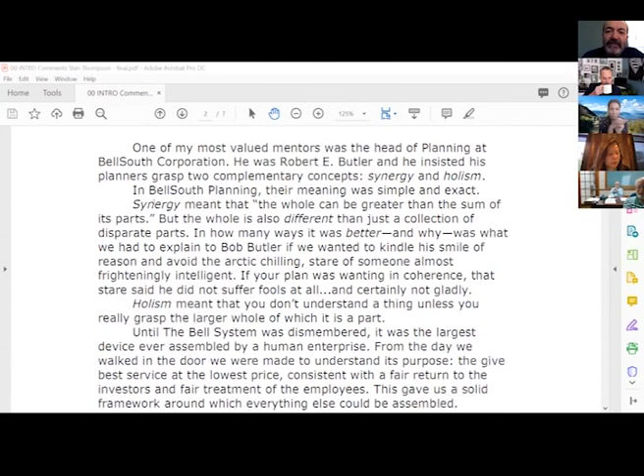Jumping in from 30,000 feet, too often we internalize the wisdom of our mentors and profit from it without reflecting enough on the lifetime of diligent inquiry that went into integrating what was shared with us. One of my most valued mentors was the head of planning at BellSouth Corporation, Robert E. Butler, and he insisted his planners grasp two complementary concepts: synergy and holism.

In BellSouth planning, their meaning was simple and exact. Synergy meant that the whole can be greater than the sum of its parts, but the whole is also different than just a collection of disparate parts. In how many ways it was better and why was what we had to explain to Bob Butler if we wanted to kindle his smile of reason and avoid the Arctic chilling stare of someone almost frighteningly intelligent. If your plan was wanting in coherence, that stare said he did not suffer fools at all, and certainly not gladly.

Holism meant that you don't understand a thing unless you really grasp the larger whole of which it is a part. Till the Bell system was dismembered, it was the largest device ever assembled by human enterprise. From the day we walked in the door, we needed to understand its purpose: give the best service at the lowest price, consistent with a fair return to the investors and fair treatment of the employees. This gave us a solid framework around which everything else could be assembled.

It was while writing a report for corporate management that I came across the hydrogen economy concept. Instantly, I knew it was the very stuff of Bob Butler's synergy, and that hydrogen would someday be the cornerstone of a new and different energy wholeness.

Eventually, in 1996, I graduated from BellSouth's Atlanta campus, retired to Mooresville, where I became involved in environmental compliance and the role transportation plays in it.

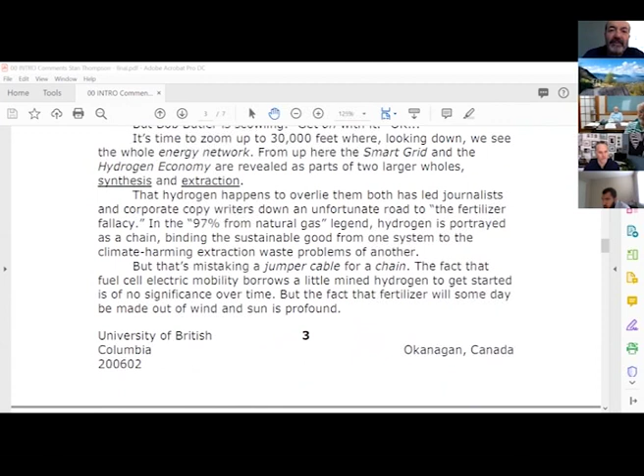From up here, the smart grid and the hydrogen economy are revealed as parts of two larger wholes: synthesis and extraction. That hydrogen happens to overlie them both has led journalists and corporate copywriters down an unfortunate road to the fertilizer fallacy. In the '97% from natural gas' legend, hydrogen is portrayed as a chain binding the sustainable good from one system to the climate-harming extraction waste problems of another. But that's mistaking a jumper cable for a chain.

The fact that fuel cell electric mobility borrows a little mined hydrogen to get started is of no significance over time, but the fact that fertilizer will someday be made out of wind and sun is profound.

Over the long sweep of time, a 30,000-foot view of the Industrial Revolution reveals a trend. In the early times, matter is extracted from the earth to make energy, leaving accumulated waste. But the future trend is for energy to synthesize matter from the atmosphere and from electrolyzed water, producing no waste.

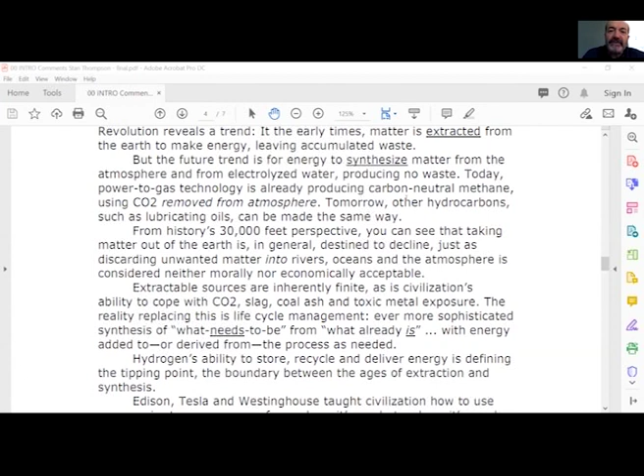Today, power-to-gas technology is already producing carbon-neutral methane using CO2 removed from the atmosphere. Tomorrow, other hydrocarbons, such as lubricating oils, can be made the same way.

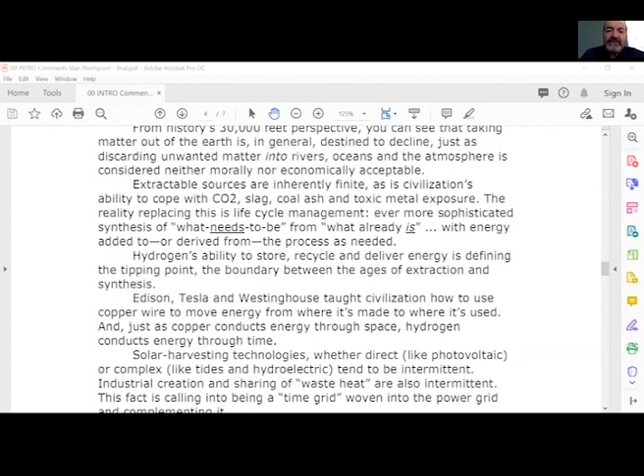From history's 30,000 feet perspective, you can see that taking matter out of the earth is, in general, destined to decline, just as discarding unwanted matter into rivers, oceans, and the atmosphere is considered neither morally nor economically acceptable. Extractable sources are inherently finite, as is civilization's ability to cope with CO2, slag, coal ash, and toxic metal exposure.

The reality replacing this is life cycle management, even ever more sophisticated synthesis of what needs to be from what already is, with energy added to or derived from the process as needed.

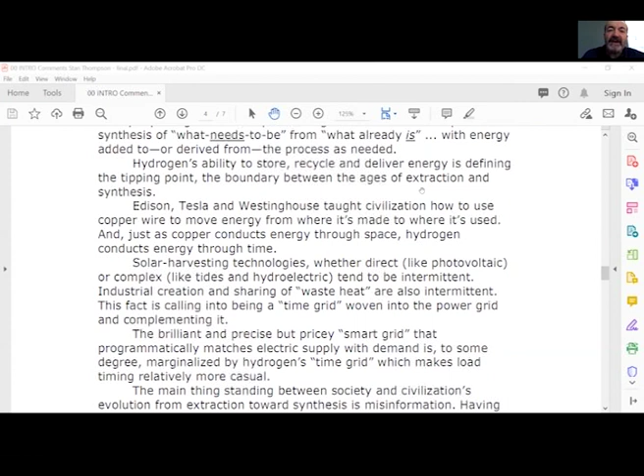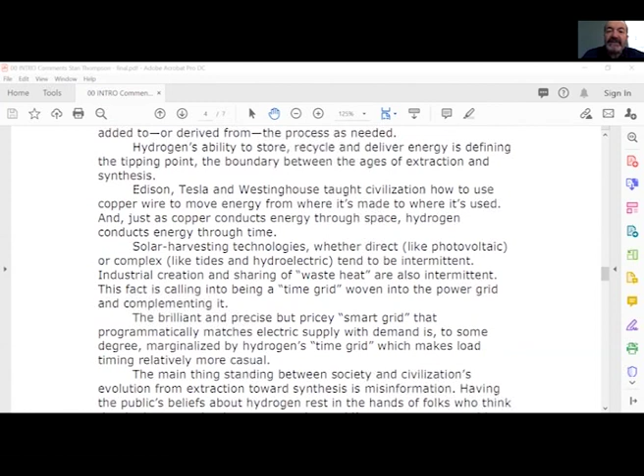Hydrogen's ability to store, recycle, and deliver energy is defining the tipping point, the boundary between the ages of extraction and synthesis. Edison, Tesla, and Westinghouse taught civilization how to use copper wire to move energy from where it's made to where it's used. And just as copper conducts energy through space, hydrogen conducts energy through time.

Solar harvesting technologies, whether direct like photovoltaic or complex like tides and hydroelectric, tend to be intermittent. Industrial creation and sharing of waste heat are also intermittent. This fact is calling into being a time grid woven into the power grid and complementing it.

The brilliant and precise but pricey smart grid that programmatically matches electric supply with demand is, to some degree, marginalized by hydrogen's time grid, which makes load timing relatively more casual.

The main thing standing between society and civilization's evolution from extraction towards synthesis is misinformation. Having the public's beliefs about hydrogen rest in the hands of folks who think that hydrogen technology uses up the world's water is unacceptable. The fact that the Hindenburg was diesel powered and that burning hydrogen is invisible has begun to penetrate that folk hoax at last.

But the too near universal mutual plagiarism, calling it 'the most abundant element of the universe' as if it were relevant, needs to be ridiculed in print until no one risks spouting it.

Public awareness of sustainability and renewable energy is well enough understood and accepted that if properly fleshed out, the extraction to synthesis trend and hydrogen's central enabling unique role in welcoming it, should be comprehensible by the educated lay public.

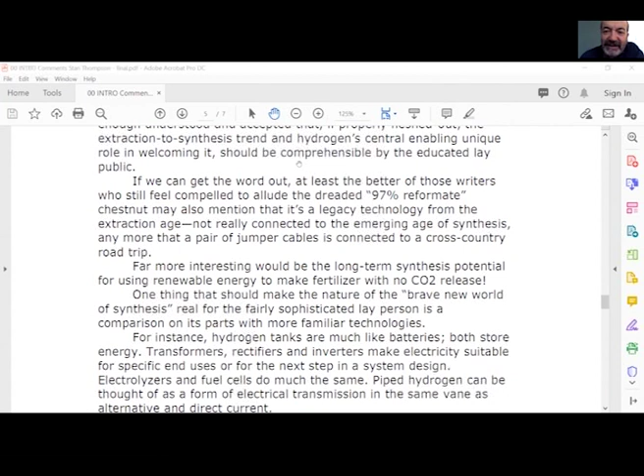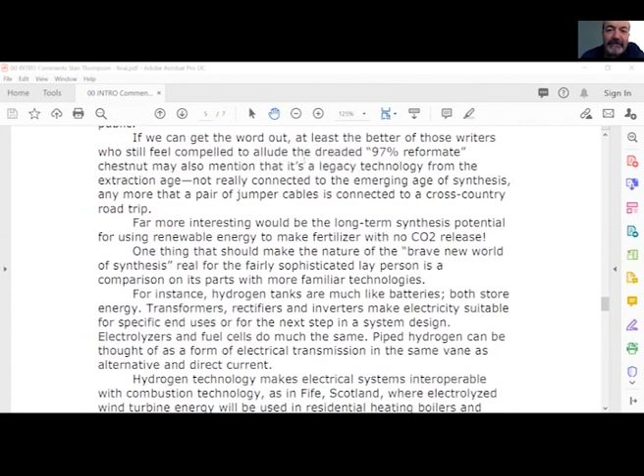We can get the word out, at least the better of those writers who still feel compelled to allude to the dreaded '97% reformate' chestnut may also mention that it's a legacy technology from the extraction age, not really connected to the emerging age of synthesis, any more than a pair of jumper cables is connected to a cross-country road trip.

Far more interesting would be the long-term synthesis potential for using renewable energy to make fertilizer with no CO2 release.

One thing that should make the nature of the brave new world of synthesis real for the fairly sophisticated layperson is a comparison of its parts with more familiar technologies. For instance, hydrogen tanks are much like batteries; both store energy. Transformers, rectifiers, and inverters make electricity suitable for specific end uses or for the next step in a system design. Electrolyzers and fuel cells do much the same.

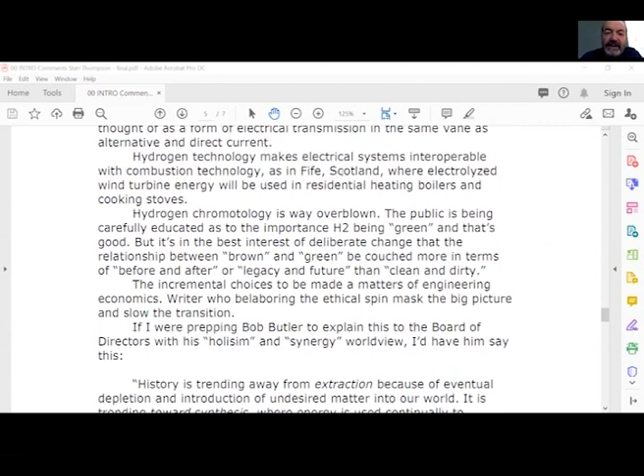Piped hydrogen can be thought of as a form of electrical transmission in the same vein as alternating and direct current. Hydrogen technology makes electrical systems interoperable with combustion technology, as in Fife, Scotland, where electrolyzed wind turbine energy will be used in residential heating boilers and cooking stoves.

Hydrogen chromatology is way overblown. The public is being carefully educated as to the importance of H2 being green, and that's good. But it's in the best interest of deliberate change that the relationship between brown and green be couched more in terms of before and after, or legacy and future, than clean and dirty. The incremental choices to be made are matters of engineering economics. Belaboring the ethical spin masks the big picture and slows the transition.

If I were prepping Bob Butler to explain this to the board of directors with his holism and synergy worldview, I'd have him say this: history is trending away from extraction because of eventual depletion and introduction of undesired matter into our world. It's trending towards synthesis, where energy is used continually to rearrange the matter we already have.

Electricity has long made it possible to create energy where most convenient, but to use it where it's most needed. The recent acceptance of hydrogen technology has given us a similar ability to separate when we create energy from when we use it. As we make all future resource allocation decisions, we need to prefer investments that fit into the emerging world of synthesis and do not depend on the retreating world of extraction any more than immediate exceptions may mandate. We need to be sure that all our people understand this, especially corporate communications, because customers and regulators need to understand it too.

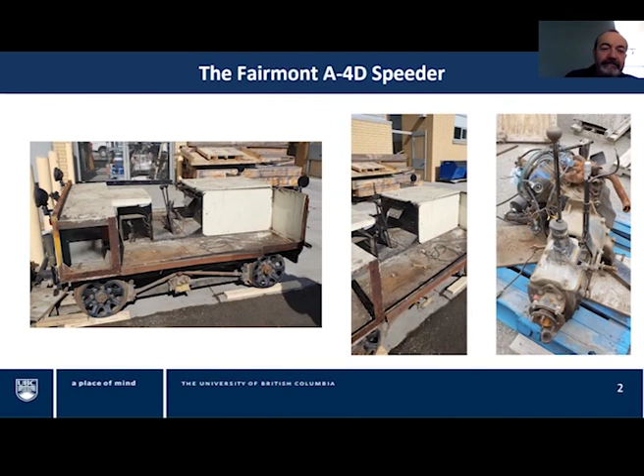It had a manual transmission gearbox with a single reverse gear and 4 forward gears. When we received it, it was not in working order, although our lab technicians managed to get the engine to work. The idea is to convert it into a hydrogen-powered vehicle where we could demonstrate the Hydrail technology and for the vehicle to be used as a test bed for future research.

The current powertrain is a series hybrid where we have a hydrogen fuel cell acting as a charger for our lithium iron phosphate battery bank. The batteries are tasked with meeting all the power dynamics, which is meant to improve performance and overall system efficiency. Power flow is unidirectional from the fuel cell to the battery bank and bidirectional between the batteries and the motor, giving us regenerative braking ability.

By design, the entire system voltage doesn't exceed 60 volts, making it a low voltage design according to CSA for safety. Low voltage means high current, which is not recommended for production as it is more costly. However, it simplifies our design and avoids us the need for specialized high voltage equipment, training, and safety certifications.

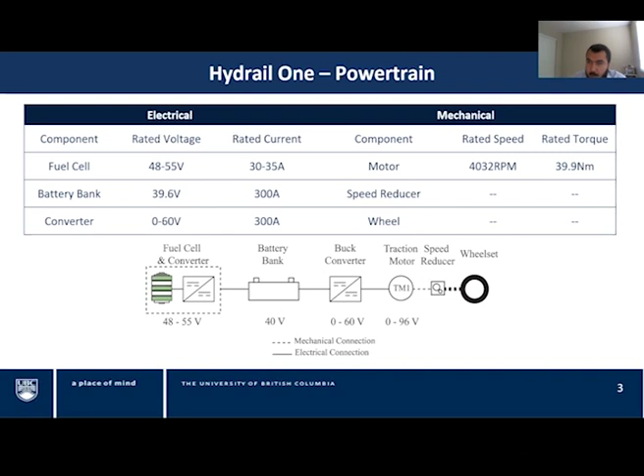So a little bit on what we plan to do with this vehicle. The retrofitted vehicle mass remains unchanged at 1,000 kilograms. We replaced the 60 horsepower engine with a 20 horsepower or 16 kilowatt electric motor.

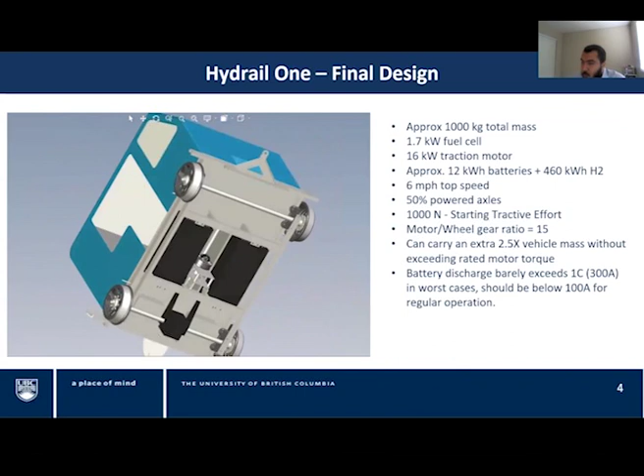The energy storage consists of 12 battery cells, each at 1 kilowatt hour, plus 2 ultra high purity, high pressure steel hydrogen tanks at 183 bar pressure, each carrying approximately 7 kilograms of hydrogen for a total onboard hydrogen of 14 kilograms. At rated power, we should get 50 minutes of operation.

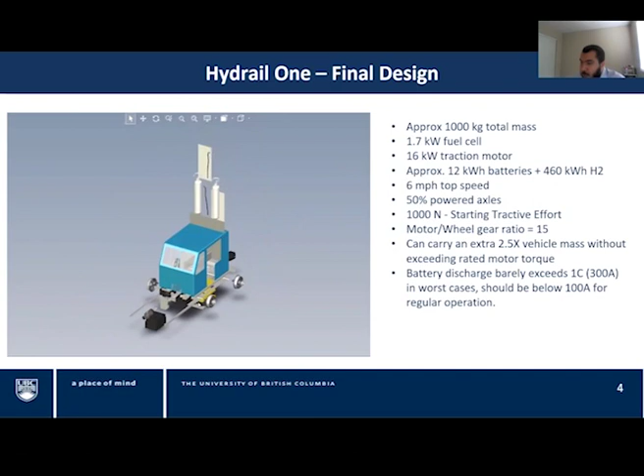However, we expect power demand on tangent level track and at speeds below 10 miles an hour to be a quarter that of rated power, for example, 3 to 4 kilowatts. This gives us approximately 7 hours of continuous operation. And if we assume a 40% fuel system efficiency, the stored hydrogen should require refilling once every 100 hours of operation.

The drivetrain was designed to focus on torque production as opposed to high speed. The vehicle should produce 1,000 newtons of starting tractive effort, meaning that for every kilogram of mass, the vehicle produces 1 newton of starting tractive effort.

For comparison, a GP9 locomotive produces approximately 2.5 newtons per kilogram, and that is a locomotive meant to pull many heavy freight rail cars behind it.

Continuous tractive effort is achieved through a combination of a unique electric motor technology and speed reduction of a 15-to-1 ratio. So we are speed reduction or torque multiplication. We're really multiplying the torque.

Theoretically, the vehicle should be able to pull 2.5 times its mass without exceeding the rated torque for the motor. And even in the most extreme cases, the batteries don't exceed their 1C discharge rate and should normally be at less than 0.3 C most of the time.

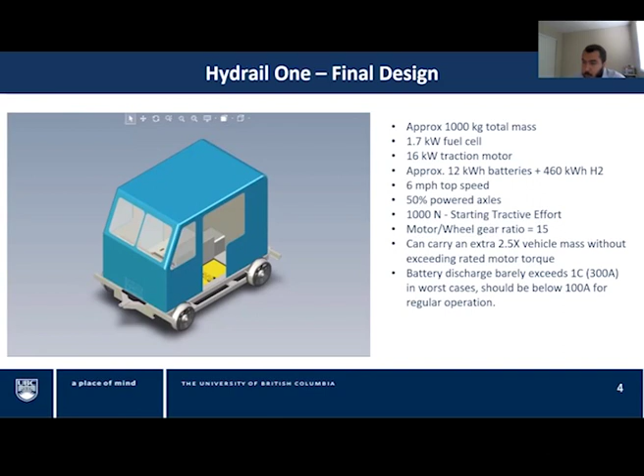So what have we done so far? Well, in March 2019, Caribou Rail delivered the speeder. Removal of the existing powertrain and other systems such as the heater, handbrake, wheels, and fuel tank was completed in May. By August 2019, we had disassembled the chassis.

Parallel with the disassembly effort, we were constantly taking measurements and updating our CAD drawing of the chassis. In September, we had a good estimate for the final vehicle mass, which we used to size the drivetrain components to ensure adequate torque production.

We also spec'd the drivetrain parts, such as the motor and speed reducer. By October, our traction motor had been delivered and our pneumatic tread brake system was designed and ready for building. We ended up ditching tread brakes for disc brakes, and our motor/speed reducer combination block was fabricated.

The battery cells, as well as the battery management system, were delivered in January 2020 and were subsequently tested. By February, we had received our Ballard fuel cell, which we have so far not tested, mainly due to regulations on in-lab hydrogen storage and then the pandemic. As of May 2020, the drivetrain and chassis are at 100%, having been assembled, tested, sandblasted, and painted.

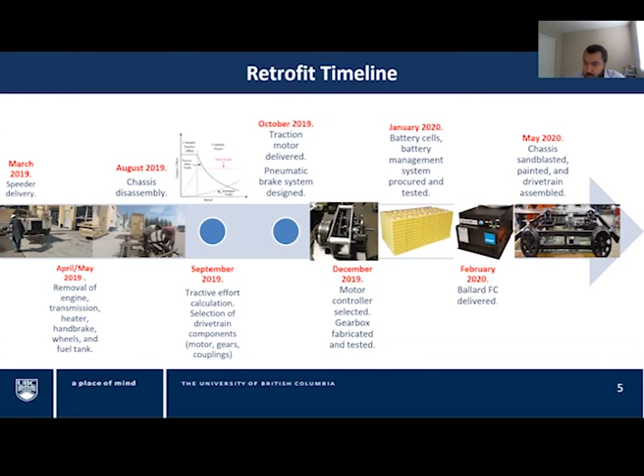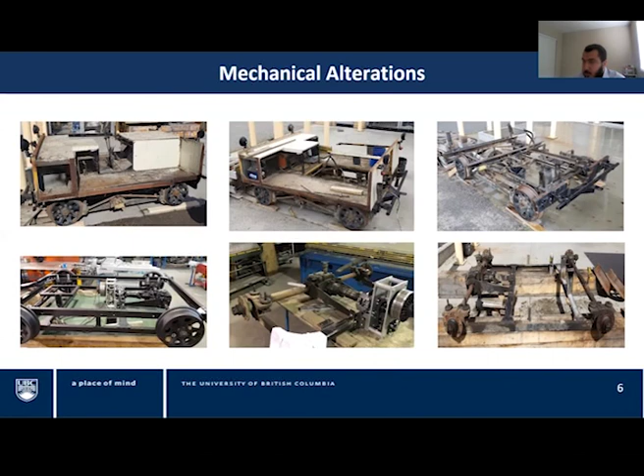Here is a short video of progress as of June 2020. So this is a week ago.

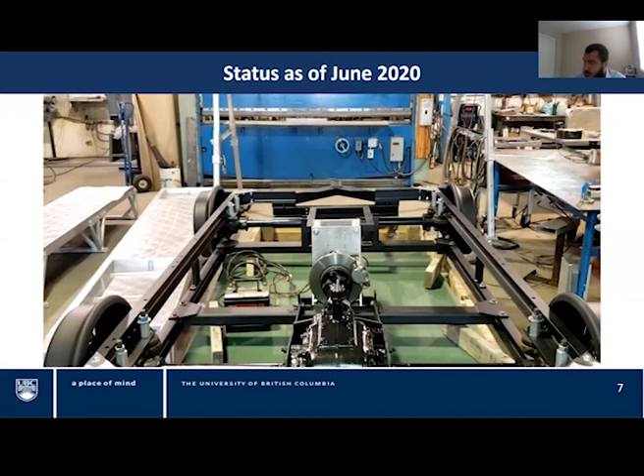All right, key design factors. When deciding upon the layout for Hydrail 1, the following objectives were kept in mind: safety, ease of use and maintenance, and simplicity of our design. Safety is obviously a priority, and therefore all design choices were made so that safety was not compromised in any way.

The greatest danger in a vehicle that runs on hydrogen gas is that the gas may combust, so our vehicle will have exceptional ventilation to prevent the buildup of hydrogen gas in case of leaks. This is why the gas lines, hydrogen cylinders, and fuel cell exhaust are all sealed off from the interior of the vehicle inside the gearbox cover, a T-shaped compartment that can't be seen in this picture, but will be seen in later pictures.

The large opening in the vehicle floor allows for airflow. Realistically, this will probably be covered by a grate vent to prevent large debris and animals from getting inside the vehicle.

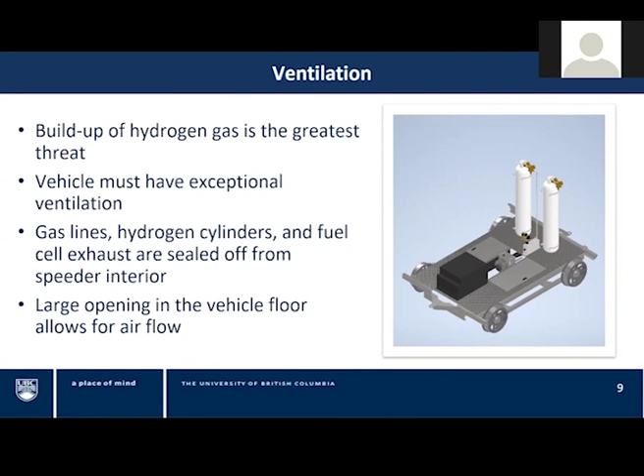The hydrogen fuel cell is the heart of Hydrail 1, providing, in addition to the battery banks, the power for operation of the entire vehicle. The fuel cell is air-cooled and therefore requires an air intake, and also produces exhaust that needs to be vented to the vehicle's exterior. For this reason, we have placed the fuel cell at the very front of the vehicle, where the internal combustion engine of a car, for example, would normally be placed.

The grill and air filter in front of the fuel cell's air intake will catch any debris, and the rear of the fuel cell is open to the exterior via the opening in the vehicle's floor. One possible improvement over the current setup would be to add a system that would catch the pure water exhaust while still allowing the air to be vented to the vehicle's exterior.

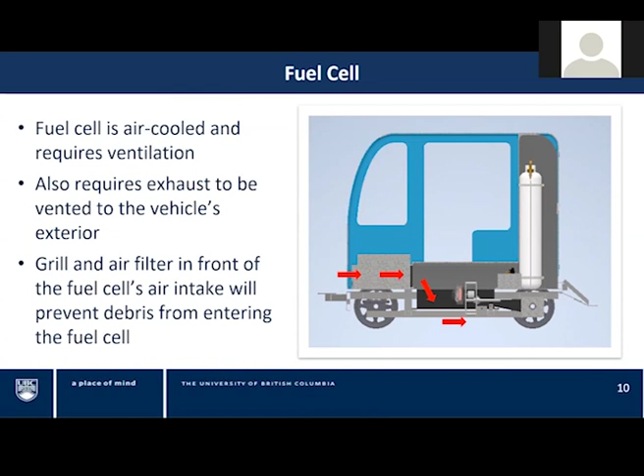The batteries that help to power Hydrail 1 are all housed in two bays located beneath the vehicle floor and accessible through hatches, one on each side. The benefit of locating them here is that it takes advantage of unutilized space and lowers the vehicle's center of gravity. Power cables from the batteries will run under the floor and up into the center of the gearbox cover to the fuel cell and dashboard.

The data cables running from the fuel cell to the valve block will run through the gearbox cover, and the gas connections from the valve block will run up to the hydrogen cylinders.

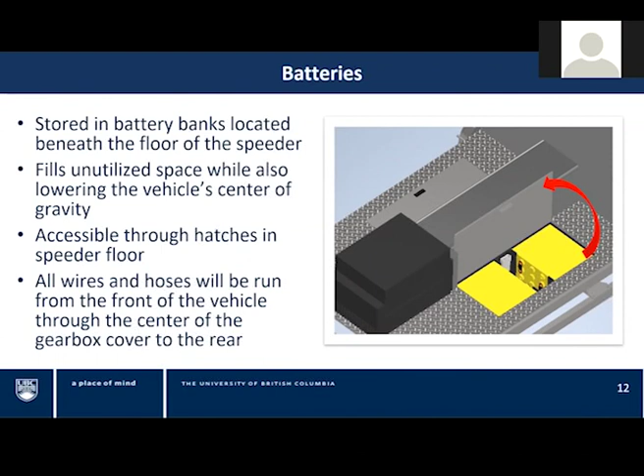Lastly, safety. It's also the most important thing I have modeled here. These features are merely representative of what will be in place in our Hydrail 1, and not necessarily going to be installed in this manner. In addition to being able to manually shut the valves in the hydrogen cylinders, there will also be an emergency shutoff button for all systems, represented by this large red button in the middle of the dashboard. There is also going to be a brake lever in addition to the throttle for sudden stopping.

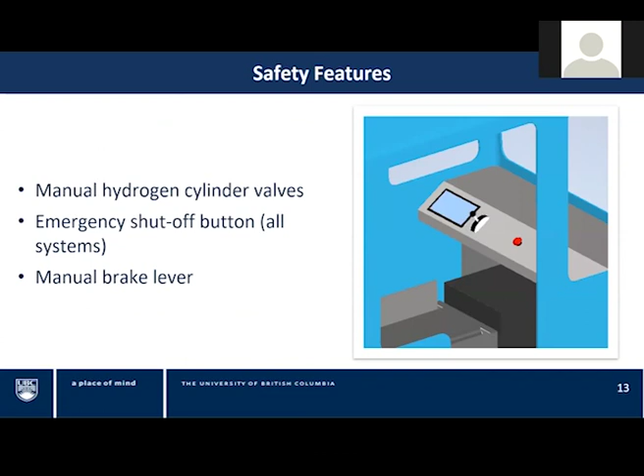All right, that's it. Thank you very much.

So here it is. So why do you need a solid state hydrogen storage? One of the big impediments to large scale adoption is cost, and a big part of that cost is in storage and transport.

Hydrogen stations, as you know, are very limited in number, although Kelowna is scheduled to get one next year. They're very expensive, costing about $2 to $3 million each pump, with very high operating costs because of the compressors and chillers needed to get to 700 bar. The second issue is hydrogen storage and transport—also very high cost, 30 times the cost of a conventional gas tank. If you imagine a gas tank in your vehicle, they're $200 to build. Right now, a high pressure hydrogen tank is somewhere between $5,000 and $7,000, if not more, to build. The high pressure requirements also create a safety factor, and put economic feasibility in play.

So how does Hydrogen In Motion resolve this issue? What we've done is made a nanomaterial. The hydrogen is attracted to the surface of the nanomaterial using van der Waals force. We keep it at 50 bar. Because it's such low pressure, we can make it in multiple sizes, from drones to swappable tanks for vehicles to tanker size for storing excess energy.

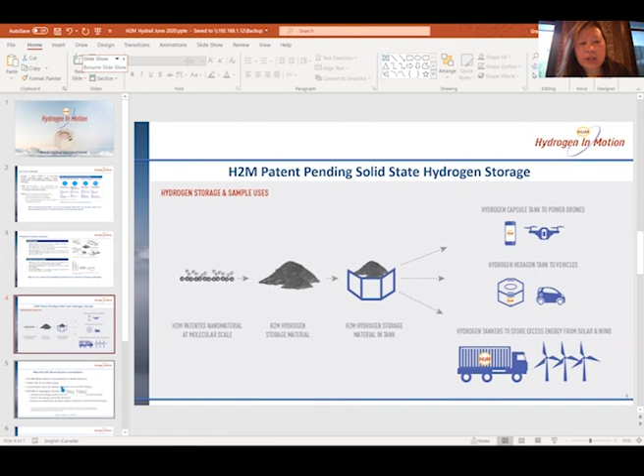So why retrofit diesel electric locomotives? Gord, you didn't go into your presentation about what the advantages are, so I thought I'd touch on it briefly. There are 25,000 diesel electric locomotives in North America—I'm unashamedly cribbing off Gord's notes, so I have to recognize that. The useful life is 50 years or more, and a locomotive costs $2 million. So the market value for just the diesel electric locomotives alone is worth $50 billion.

To retrofit a hydrogen electric locomotive, we're looking at the economic drivers. In Canada alone, your GHG savings is 6.4 megatons of CO2. That represents a carbon tax saving of $192 million at $30 a ton. And then there's also a reduction of non-attainment penalties—I know Laszlo's on the line, so he would understand this.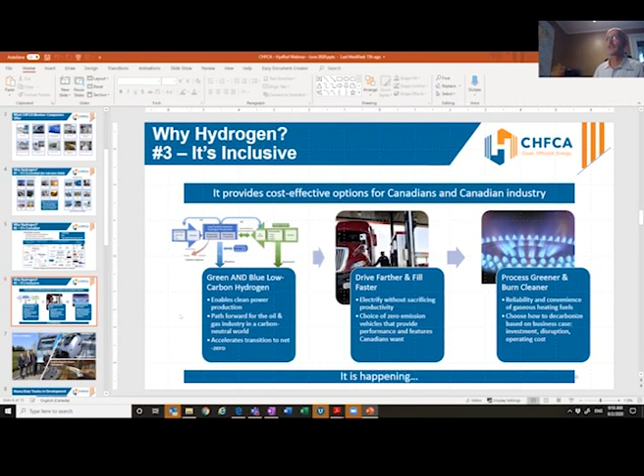So what's happening? Well, there are things certainly happening. As was mentioned earlier, Canadian companies are involved in hydrogen fuel cell projects around the world. Studies are ongoing, but it is certainly taking its time, and we certainly want to find ways to move that forward. We have many companies involved in development of hydrogen fuel cell equipment. And we just announced here in Canada, Daimler and Volvo and Rolls-Royce are expanding the work they're doing here in Canada on fuel cell technology to move that into the heavy-duty space.

We have, of course, the transit buses that are the most advanced fuel cell applications, ready for commercialization today. Many OEMs offer fully backed and warranted fuel cell electric buses, and these are ready for deployment today, and we need to be starting to look at them because they offer a very good solution for transit agencies.

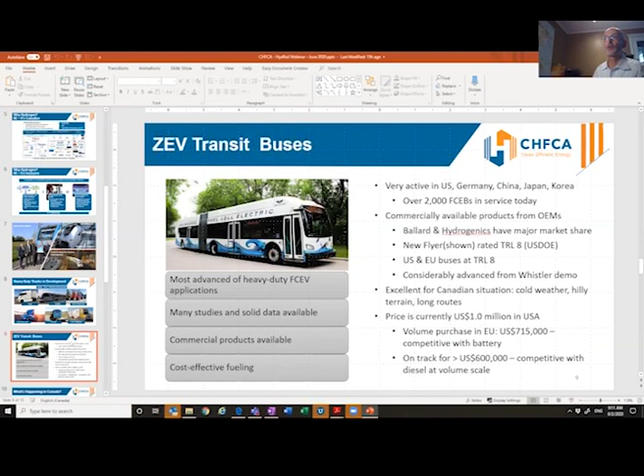So what are we seeing as a result of all this in Canada? Well, we have this technology leadership that's leading to investment, and we are seeing investment flowing into our Canadian companies now. We're seeing jobs and growth. But we always run into the question of, well, haven't we seen this before? There was a boom back in the early 2000s. What's different now? And it is different this time.

The improved cost and performance of the fuel cells and fuel cell products, the improved costs and broad availability of low carbon intensity hydrogen, and the cost for producing that is dropping. And also policies are being put in place globally that are pushing us to a carbon constrained economy that provide the business case that the hydrogen fuel cells need.

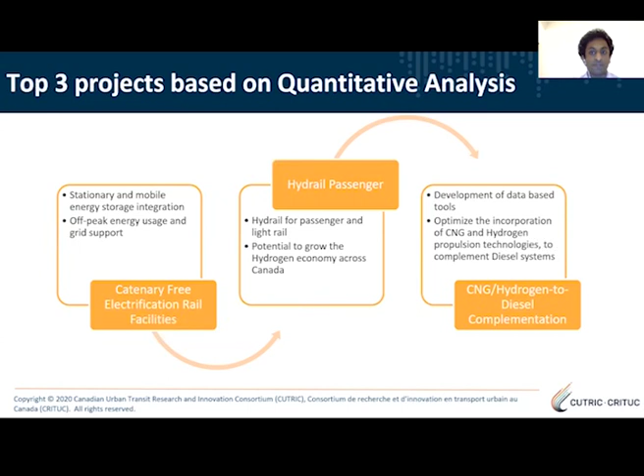Some conclusions we found from this initiative: in the short term, there is opportunity to electrify switch engines in train yards. Not an entire locomotive powertrain, but switch engines within train yards have a lot of opportunity to reduce local GHG emissions within the train yards themselves.

We also found there's an opportunity for Canada to leapfrog catenary electrification systems and move directly into advanced non-catenary electrification systems such as Hydrail and battery energy storage systems. Canadian rail industries have a strong desire to support domestic advanced rail technologies through demonstration, research, and development. We also found hydrogen fuel cell-based electric rail technologies to be one of the most beneficial ways to achieve emission goals and grow the economy through demonstration, research, and development.

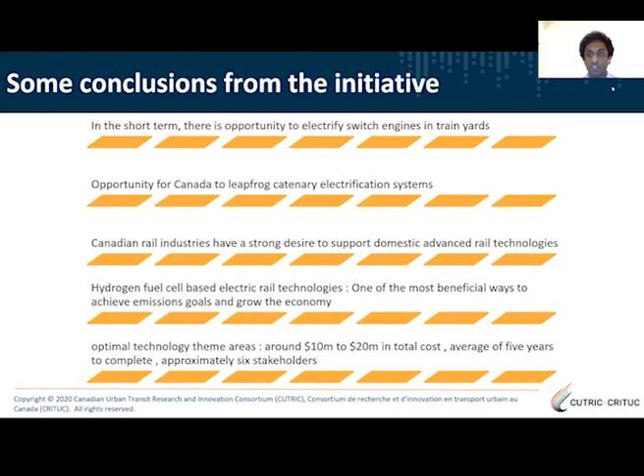One conclusion was that the optimal technology theme areas, based on interest, had a total cost around $10 million to $20 million, an average of 5 years to complete, and approximately six stakeholders—beyond which the project achieved a level of complexity that made it difficult for stakeholders to really sink their teeth into it.

This report is available on our website as of earlier this week, free for download. It will also be available from Transport Canada's website later in the year as they work through some COVID protocols, but it is available on CUTRIC's website at the moment. It's about a 100-page report—I summarized it quickly since I was only given about 10 minutes, but there's a lot of detail in there.

The last project I want to touch on—I believe Gordon, you were on one of our presentations as well for the rail report, so we do appreciate your engagement with that.

The last project I want to touch on is the British Columbia Fleet Electrification Feasibility Analysis and Simulation-Based Planning.

We have an internally developed route simulation tool that, for transit agencies in the initial stages of planning their electrification rollout, provides an assessment of their routes' capability to be electrified using today's existing technology, whether hydrogen fuel cell or battery electric, so agencies understand what it would take to electrify their fleets, what investments they'd need in chargers and fueling stations, and what routes would need to be modified, since it wouldn't be a 1:1 diesel replacement.

We found those feasibility studies are a huge aha moment for transit agencies. They don't deter agencies from electrifying, but actually drive forward electrification as they get a better understanding of what it really requires. So we proposed to the British Columbia government a provincial fleet electrification feasibility study.

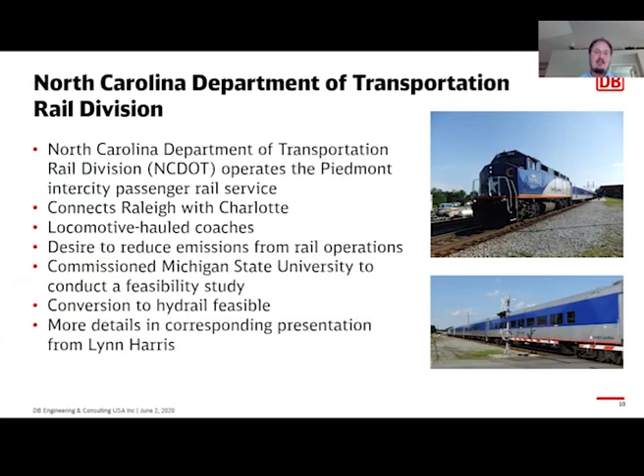North Carolina, we just completed a report at MSU for North Carolina looking into intercity passenger rail services. They are much higher power than anything Hydrail currently operating worldwide or any of the previous Hydrail demonstration projects. And we could confirm that it's actually technically feasible to operate that with a Hydrail solution. The Piedmont service connects Raleigh with Charlotte. It's locomotive hauled, different to the multiple units that we currently see. And Lynn will provide more information on that.

Last, we have Momo presenting from the California Department of Transportation, largely the rail division. They own several locomotives and rail vehicles and would like to decarbonize all of them. They provide equipment to operators. Pretty much everything right now is locomotive-hauled coaches, diesel electric locomotives, and overall the state has very ambitious goals to reduce greenhouse gases as well as air quality impacting emissions. They have commissioned DB Engineering and Consulting to investigate alternatives to diesel, and we're working collaboratively with others on that right now. Momo will actually provide you with more information on that.

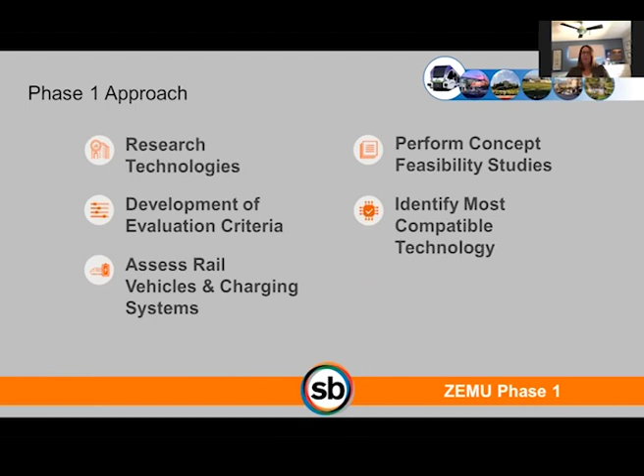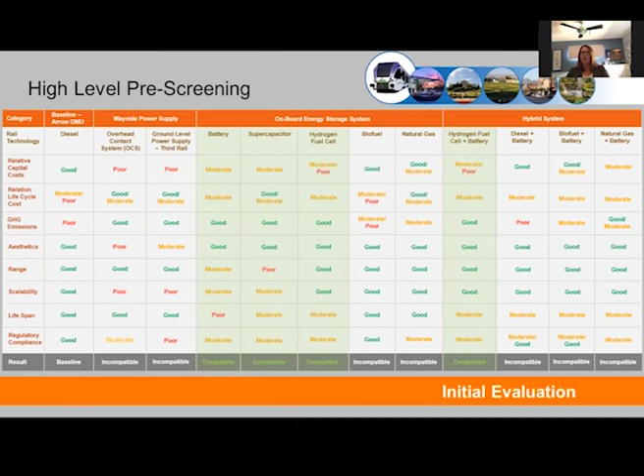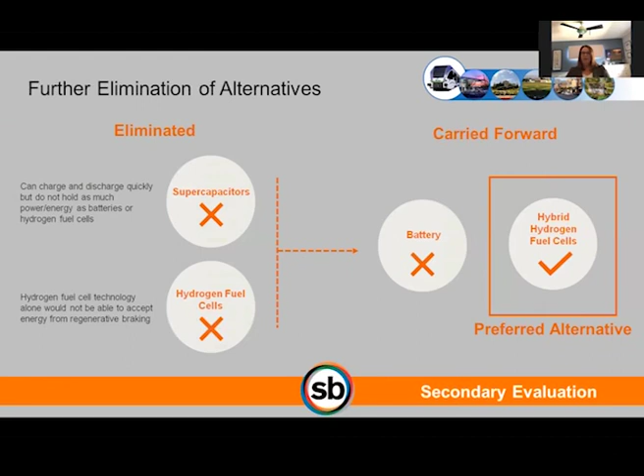I will say that SBCTA has a general aversion to overhead catenary, which I think helped us progress along. We do have a project to build half a mile of light rail in our county, estimated to cost almost $100 million, and it's going to be hard for us to sustain that level of funding if we don't find a different way to keep building out our transit network. We looked at supercapacitors, hydrogen fuel cells on their own, and obviously batteries, and then we looked at a hybrid of battery and hydrogen fuel cell, with the hybrid ultimately being our preferred alternative.

As part of our grant from the state, while we are going to operate a 2-car consist, they wanted to take the opportunity to demonstrate as much potential as there is for Hydrail.

So 2-car consist is what we're going to operate. That's one scenario we looked at. I think that the most appropriate vehicle, if we're going to run to LA Union Station, is the 4-car consist. And so we're looking at that.

And then because we are not building a 4-car consist, we had to look at a scenario 3 where we paired 2-car consists together and basically negate the weight of the Tier 4 diesel engines that wouldn't be in the ultimate 4-car consist that was hybrid, hydrogen and battery powered.

We looked at vehicle characteristics, obviously, for all of those, what they weigh, their mass, loading condition, auxiliary loads. We looked at the track characteristics. We have in the 9-mile corridor, the initial corridor, a 2% grade one way. So that takes a lot of power. We are in a very warm area, so air conditioning is extremely important. And then we just defined the key requirements.

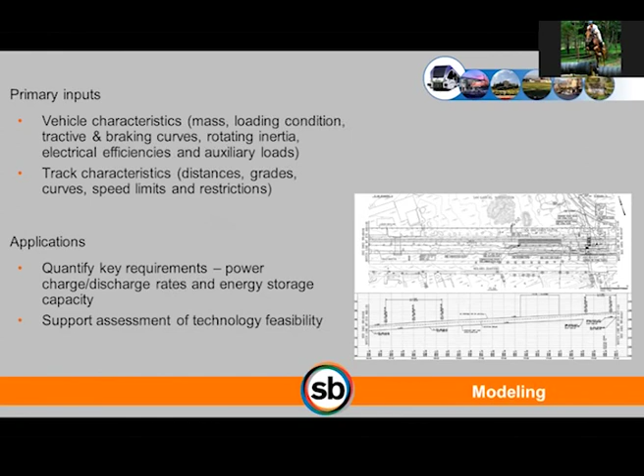So basically, this is the 2-car consist. There was a model created where we put all this data and key information into to create what our outputs would be. And that's what you see on the screen.

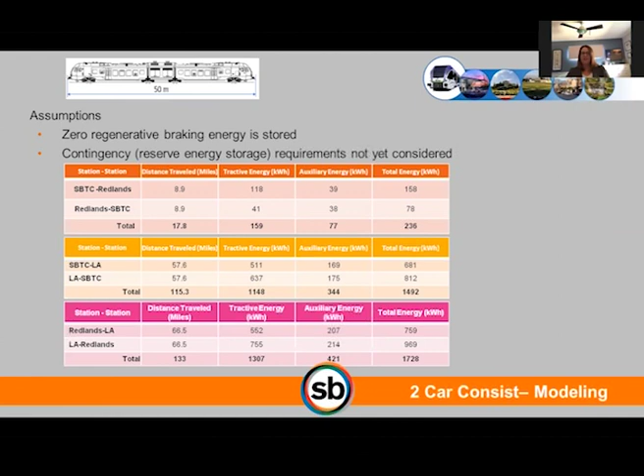So San Bernardino Transit Center to Redlands, that's our 9-mile corridor. That'll be our test bed. San Bernardino Transit Center, well, I'll just skip to the pink one at the bottom. So Redlands to LA is like our ultimate goal, to be able to demonstrate we can do this. So basically, we need to be able to run pretty much regular service on the 9-mile corridor and then demonstrate that this has feasibility to run into LA, which is about 60 miles more.

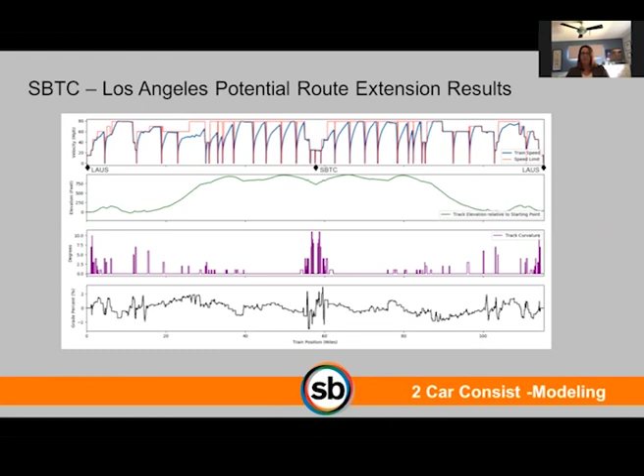So this is the way the model changes when you have to extend this to Los Angeles. So you can see very different. And you'll see that in the summary table as well, that the amount of power needed drastically changes, which makes sense. That was important in staff making a recommendation to our board on what we thought the preferred alternative should be.

One piece that we did is we wanted to really find out, do we need to capture regenerative braking or not? And so the slide that you see up there demonstrates that yes, it has a big impact, and it was worth including in the design.

So just in our 9-mile corridor, on one of the runs, 60%, and on the LA run, on one of the runs, 30%. Combined, 26, 22%.

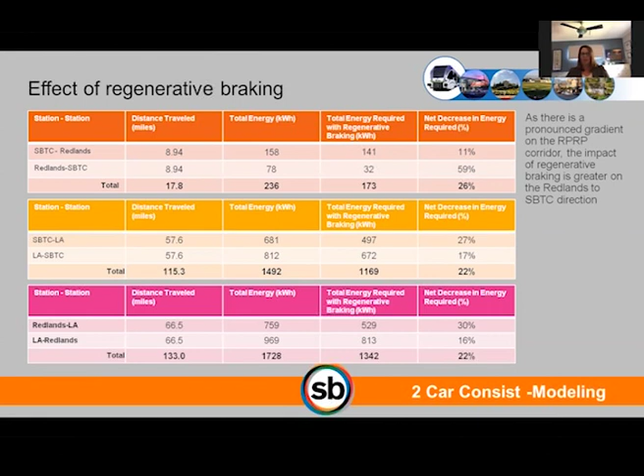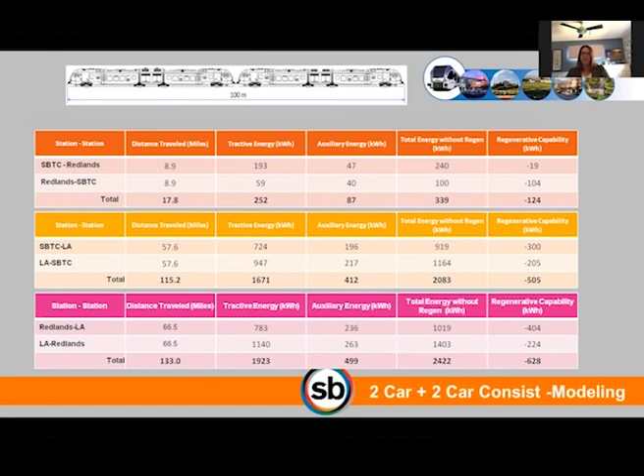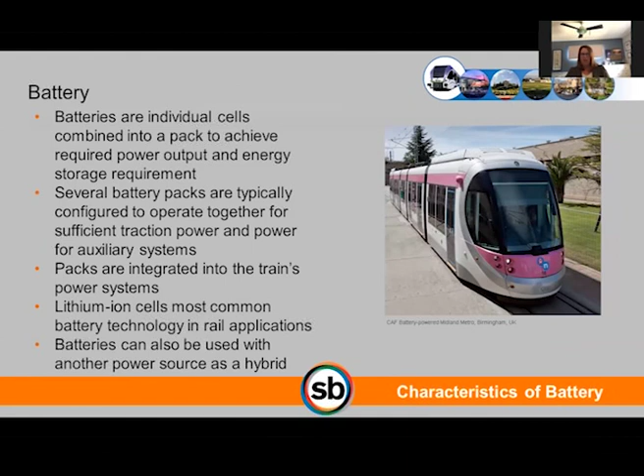So we looked at batteries, and then we looked at combining batteries and hydrogen fuel cells. And I think you guys all know what batteries are, so I'm not going to spend any time on that. Again, one of the areas that we were most concerned about was charging methods for batteries.

Specifically in the Redlands, city of Redlands area, it's a heavy historical district. There would have been a lot of adversity to installing overhead catenary. We're also extremely constrained as far as right-of-way width in that area, because we do have historic buildings on both sides of the right-of-way that we just can't, we have to protect. In addition to the cost of building it as well as maintaining it over time.

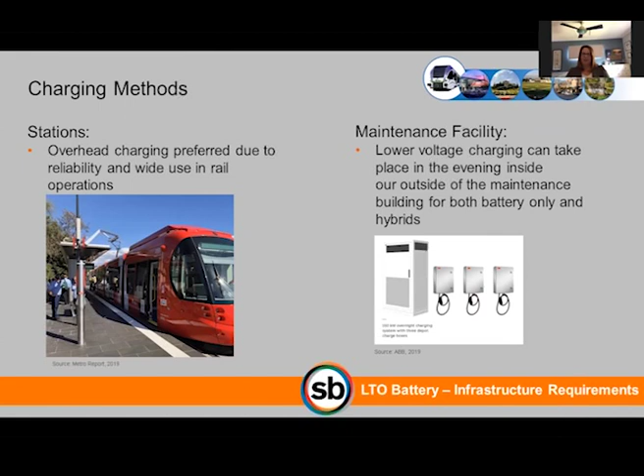Here, what I would like to point out is when we started out, our goal was to have the same performance capabilities of the DMU. As we went through contract negotiations, we did agree to have basically a floor and a target. So because this is a pilot, we needed to be a little more flexible. So right now, as we're going through conceptual design, that's what we're working through right now. Yeah, that's your floor, that's the minimum you have to do, but our target is this. And so that's kind of what we're working through right now as far as performance.

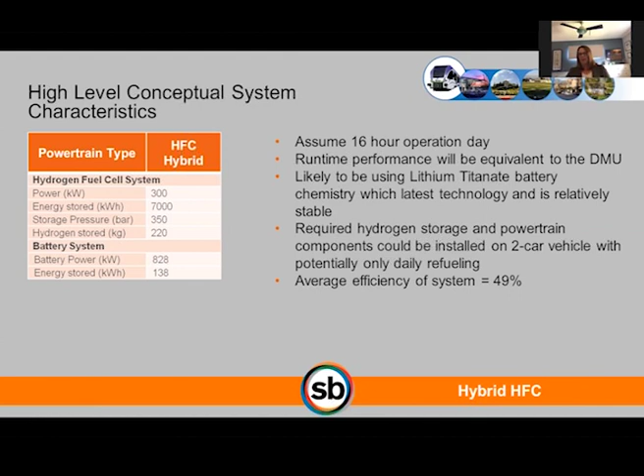I think I've covered this - it really focused on not requiring wayside infrastructure to recharge. What we really found is that with the hydrogen fuel cell piece, it provided us the viability to extend to LA Union Station without having to build inline charging, and gave us more flexibility.

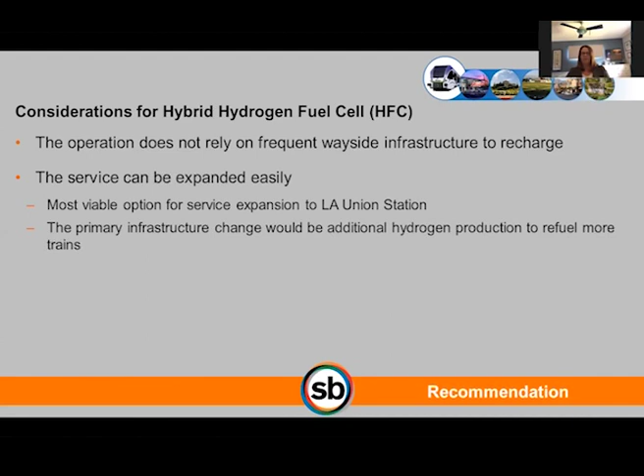That is our ultimate goal - to allow this to be expandable. We approached it wanting to keep as much of the DMU the same as we can, because Metrolink's going to have to maintain these, and we don't want a one-off vehicle. So we focused on what needs to change: the tanks, the different fuel tanks, additional volume or space needed compared to the diesel engine, the leakage monitoring equipment, temperature control especially for the batteries, and proper ventilation.

I'd like to mention that we are building a maintenance facility right now for the Arrow service, and that project was a little ahead of this opportunity to build a ZEMU. So we are working diligently to identify what needs to be modified in that facility, and it is not insurmountable - it's completely reasonable, and I think we'll be able to accomplish that.

Now that's different than the hydrogen fueling infrastructure. That will be at the facility, and we'll initially truck in, and we'll have a mobile fueling unit. But I want to touch on a couple things.

One is we, as SBCTA, do the regional planning for transportation. We just completed a zero emission bus study looking at our 5 county bus operators, and so we're developing a plan for implementation of that. I see hydrogen as a key component of that.

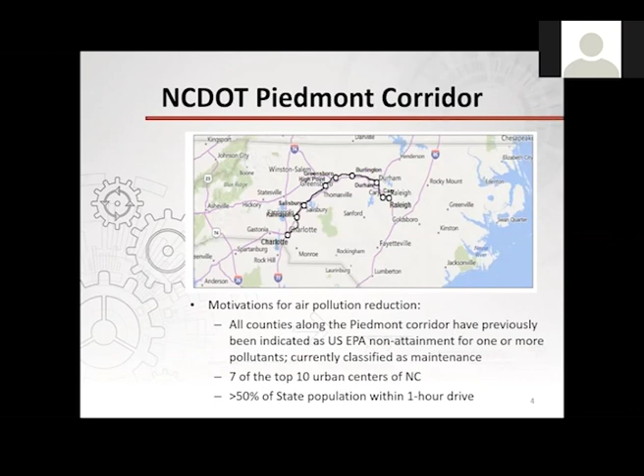We want to make sure we're not unduly contributing toward air pollution. The corridor also encompasses 7 of the top 10 urban centers of North Carolina, and greater than half the population of the state overall lives within a 1-hour drive of the corridor. So this is a substantial impact on the citizens of North Carolina.

Just more about our operational overview. Again, NCDOT is the equipment owner and maintainer of the rail vehicles. We are operated by Amtrak. We're dispatched by NS and CSX. Our corridor is 173 miles in each direction with 9 total stops, including Raleigh and Charlotte. Our travel time is just over 3 hours each direction, so we're very, very comparable with car travel between the 2 cities.

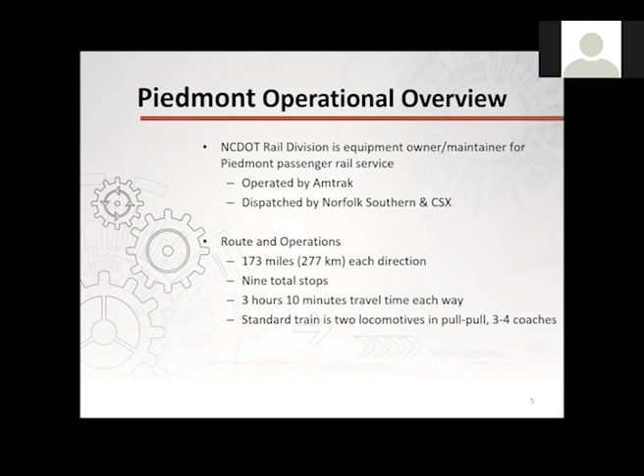Our standard train configuration is 2 locomotives in a pull-pull configuration and either 3 or 4 coach cars, depending on specific ridership for the day. Our fleet is 6 F59PH locomotives, 2 F59PHIs, and 5 cab control units. A cab control unit is simply a demotored F59PH locomotive—exact same exterior body, just everything stripped out of the long hood. It has no ability to propel itself. It's run in conjunction with a locomotive to provide pull-pull or push-pull operations. And we are currently planning to add 3 locomotives to the fleet beginning next year.

Now, the actual motive specs for our fleet: our locomotives have 3,000 horsepower EMD 710 engines. That's about 2,200 kilowatts. That's actually an interesting size to work with here because that's about the same capacity that a standard freight switcher or even some short line freight locomotives use. So one thing we can take from that is whatever we're able to implement should be easily transferable to the freight industry in that regard.

Our head-end power engines are Caterpillar C15s on our newer locomotives, and Caterpillar C18s on our older legacy locomotives. Our older locomotives, which were all rebuilt between 2010 and 2013, have prime movers that are currently EPA Tier 0 plus, with Caterpillars at Tier 2. Our newer locomotives, which make up 2 of our overall fleet, have prime movers at EPA Tier 0 plus, with HEP engines at EPA Tier 3.

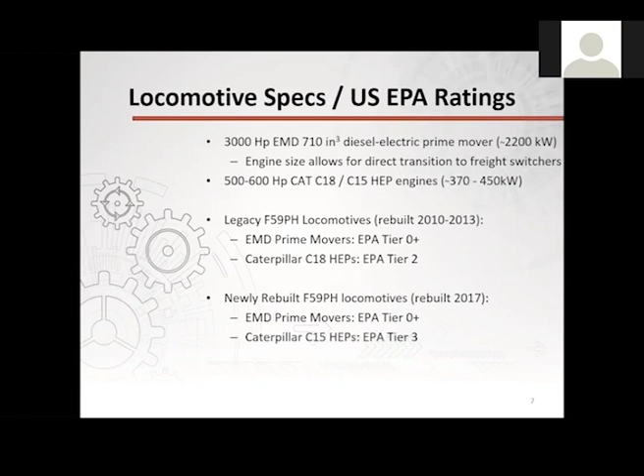So we've got a ways to go before we are all the way to where we need to be, at Tier 4 or better. Our efforts to date include biodiesel fuel testing, retrofit emissions technology implementation, and then what we're all here for, Hydrail research, which we hope to implement within the next several years.

Just touch very briefly on the testing we've done to date. In the interest of time, I won't go into tremendous detail, but the Rail Division has worked with the NC State Environmental Engineering Department since about 2009 to test various blends of biodiesel fuel. We've seen a 30 to 60% reduction of hydrocarbon, carbon monoxide, and particulate matter using lower blends of biodiesel fuel, about the 20 to 40% range. We see some marginal improvement on NOx, but not a ton, and that's to be expected - that's how biodiesel fuel typically operates.

We also built a retrofit selective catalytic reduction based aftertreatment system that we retrofitted onto one of our locomotives, and have plans to implement similar systems on additional locomotives going forward. That resulted in an emissions reduction of between 55 and 80% of all pollutants. So if we combine this retrofit emission system with biodiesel fuel, we should be able to achieve Tier 4 that way. And that is a really excellent bridge technology that can carry us for the next several years until Hydrail becomes much more standard.

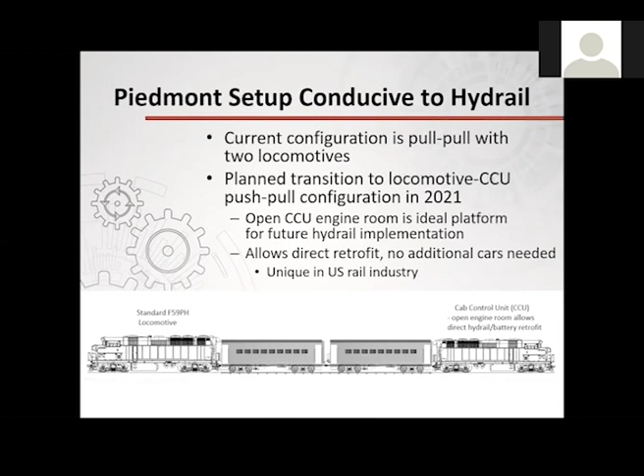We do have the option of phased implementation. We envision something along the lines of first implementing batteries into the CCU, to where you have a diesel locomotive, hopefully a Tier 4 diesel locomotive using the technologies we've pursued so far, and then a battery-powered CCU augmenting that on the other end. Subsequent to battery implementation, we could also add hydrogen tanks and fuel cells to where you then have a full-blown diesel Hydrail hybrid train.

Later down the road, when our locomotives go up for their next rebuild, which would probably be within the next 8 to 10 years, we imagine Hydrail will be established technology enough by that point that we could just pull the diesel prime movers and implement Hydrail engines, where we would have fully operational Hydrail trains. And then following that, we think we'd be in a position where we could be a model for national propagation of this type of system across other comparable intercity passenger rail agencies, and hopefully, as I alluded to earlier, even short line freight.

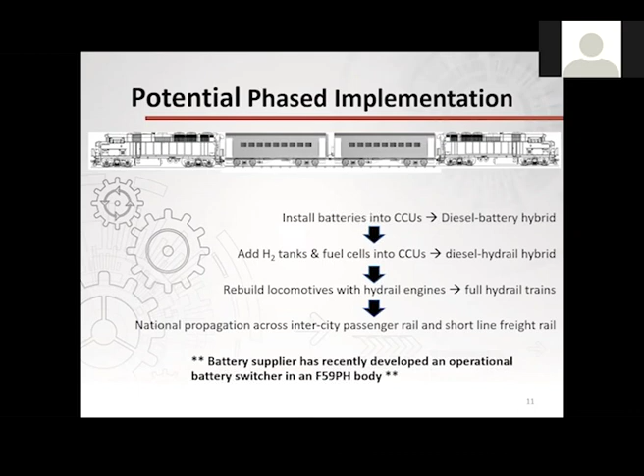That last bullet point is actually pretty important. Our primary battery supplier has recently developed an operational battery switcher for an F59PH locomotive body, which really means we've crossed all the technological hurdles ready for this first step of implementing batteries into CCUs. That would really just be an application exercise at this point. So we're making good progress on actually bringing this to reality.

So I'll kind of gloss over that one in the interest of time. This is an image of the inside of our CCU. Again, it's just the long hood of an F59PH locomotive, stripped of all engines, generators, and other auxiliary equipment.

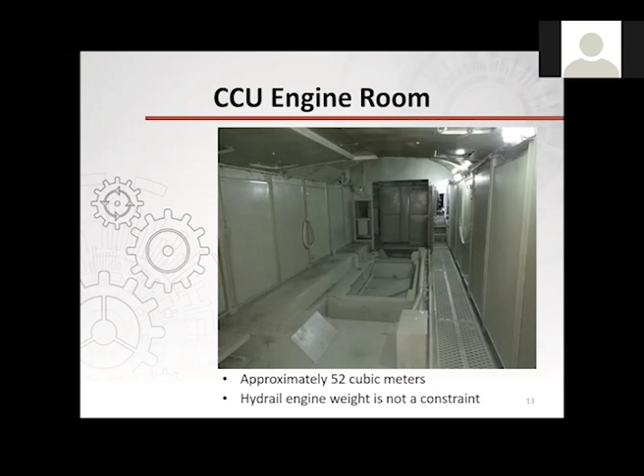Andreas and I actually took some detailed measurements of NCDOT's equipment several months ago, and it's about 52 cubic meters total, so we have a decent amount of space. One of the other things we can leverage to our advantage is that rail is not weight-limited in the same way cars and other vehicles are, so we can really pursue a heavier-is-better model as we go about physical implementation of this technology.

So the status of our Hydrail research. In 2018, NCDOT contracted with Andreas and his team at Michigan State to perform a feasibility study on NCDOT's Piedmont trains. As Andreas mentioned earlier, if we were to implement Hydrail in the future, we would be the largest rail fleet to do so. The feasibility study was actually just completed last week, and we're in the process of reviewing that, but it confirmed that a Hydrail propulsion system is feasible for NCDOT, specifically a 2-locomotive downsized fuel cell hybrid with a plug-in.

What that long name simply means is that we could divide the Hydrail propulsion components between the locomotive and the CCU. As I mentioned, our existing diesel engines are about 3,000 horsepower, and we could put around 1,500 horsepower or maybe a little more in both the locomotive and CCU to create an equivalent propulsion powertrain to what we currently have. We see best results if we recharge our batteries after each round trip between Raleigh and Charlotte. We have a captive fleet - all of our locomotives return to Raleigh every night, so that falls right in line with standard protocol for NCDOT, so we'd certainly be able to readily embrace charging our batteries on a daily basis.

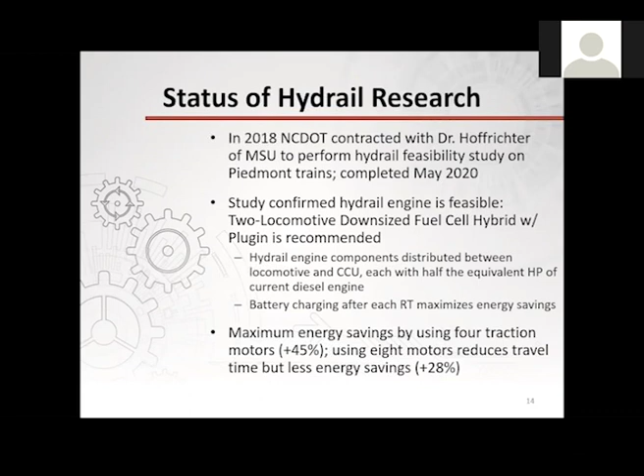So that's a decision NCDOT is going to have to make, and that falls into exactly what our next steps are - an economic analysis to determine the preferred route, whether Rail Division management wants to see trip time savings. I forgot to mention, implementing 8 traction motors actually cuts about 10 minutes off your trip time, which is not insignificant. NCDOT has made a big push over the past 10 years or so to save time wherever possible, so trying to figure out what's best from an energy savings versus trip time savings standpoint will require some further attention.

We are at the point now, based on the results of the study, where we can pursue building a prototype or demo unit, and some of the major factors there are going to be securing the funding, identifying our supply chain, identifying what tests are going to be required. We'll definitely be utilizing the H2 at Rail program that's been mentioned several times already. And the Hydrail report is going to be made available to the public for anyone who wants to see it after we get it finalized and blessed by everyone within NCDOT.

I'll talk a little bit briefly about Hydrail infrastructure. This has been touched on several times already, but we'll talk specifically for North Carolina. The results of the study confirmed that steam methane reforming and biomass sources are going to be very viable for NCDOT, both resulting in significant net positive energy reduction. North Carolina is actually very well positioned to start producing hydrogen. We have a lot of hog farms and fertilizer production as major existing industries in the eastern part of the state, and both can readily be utilized as the groundwork for hydrogen production.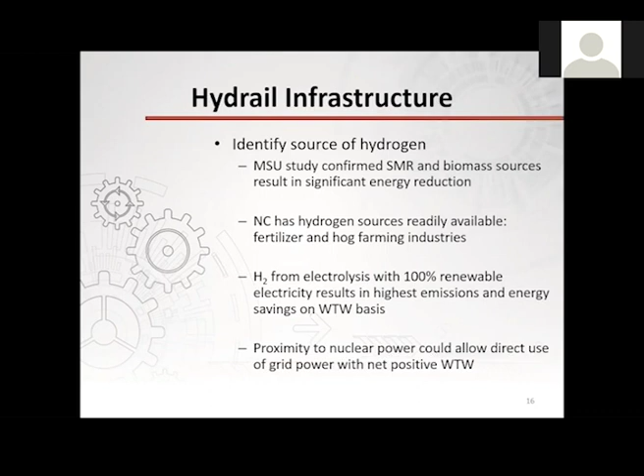We also have options such as hydrogen from electrolysis with 100% renewable electricity. That actually results in some of the highest emissions and energy savings on a well-to-wheel basis. North Carolina is also uniquely positioned in that we have a lot of extra surplus electricity from nuclear power, so we could utilize that as well and be able to just take grid power without increasing fossil fuel dependency - so again, a net positive well-to-wheel.

Another big thing to consider when talking about Hydrail infrastructure is transportation. We would initially be looking at delivery from off-site via trucks when we only have 1 or 2 Hydrail-equipped locomotives. But we would also look into building a hydrogen plant as we expand our fleet. We're well situated to possibly one day build a larger multi-user hydrogen plant. The rail yard in Raleigh is located in close proximity to other industries like waste industries, the Raleigh bus terminal, and other potential long-term users of hydrogen.

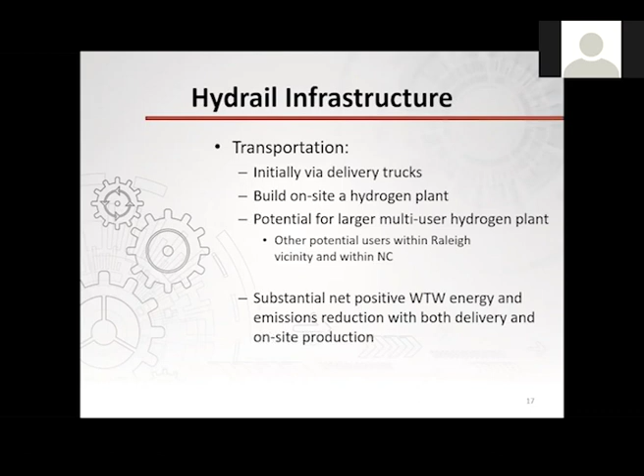One of the things the study found is that we see a net positive and almost indifferent well-to-wheel energy and emissions reduction with both delivery and on-site production. So we think we're set up very good in that regard. Just a few quick slides and then I'll wrap up.

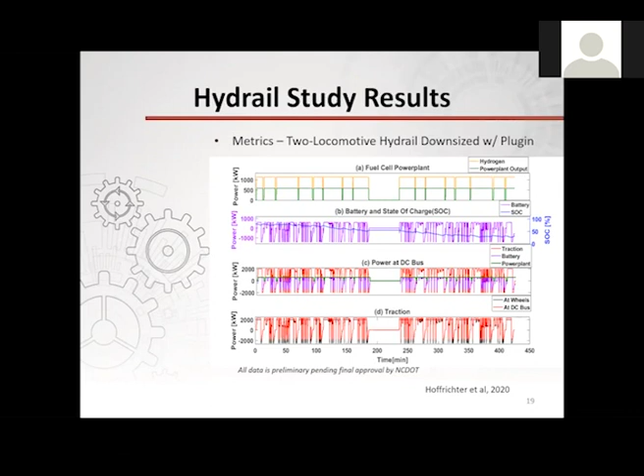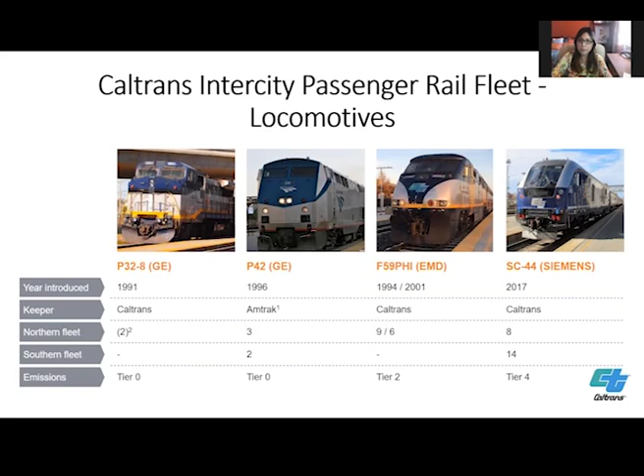Recently, we procured Siemens Charger locomotives, the SC44. We own 22 of them, 8 in Northern California and 14 in Southern California, and they are Tier 4 locomotives. Next, these are the cars that we either own or lease.

We have the California cars and we own all of them. We have 66 of them in Northern California. And then we also have Comet cars.

We also have Surfliner cars, which are bi-level cars built based on the design of the California cars, so we kind of call them California 2 cars as their nickname. We have 12 of those that we own in Northern California, and we also own 10 of them in Southern California. Then 39 of those Surfliner cars are leased from Amtrak; those were a joint procurement between Amtrak and Caltrans.

We also lease Superliner cars, old cars that we lease from Amtrak. We have 11 of those in Northern California, and 19 in Southern California.

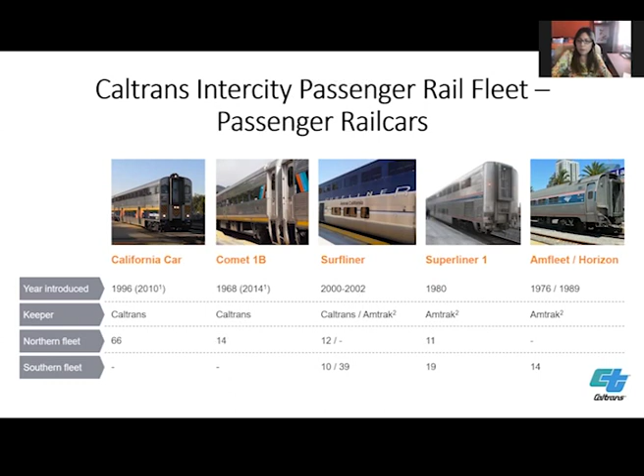We have 14 Amfleet and Horizon cars that we also lease from Amtrak, all utilized in Southern California. We also have 49 cars currently being produced by Siemens that will be deployed on the San Joaquin Corridor in the near future. Those cars are a similar design to the Brightline cars used in Florida.

So where are we going from here? The passage of AB 32, the California Global Warming Solutions Act of 2006, was landmark legislation requiring California to reduce GHG emissions to 1990 levels by 2020. I'm happy to say we have met that goal. Now we are working on SB 32, which requires GHG levels to be 40% below 1990 levels by 2030. That's what we're targeting right now.

There was also a governor's executive order, B-30-15, that further required GHG levels to be 80% below 1990 levels by 2050. We definitely believe the transportation sector must play a large role in these reductions, which are the most aggressive in the country.

We can clearly see every day that climate change is already affecting California. We see extreme heat and more frequent, intense wildfires. We used to get wildfires only in summertime, but now we see them in October, November, and even December. We definitely see poor air quality in many areas of California, drought, and related public health concerns—you name it, we have it in California. We see what will happen if we don't do anything about it, so we are working towards meeting these aggressive goals.

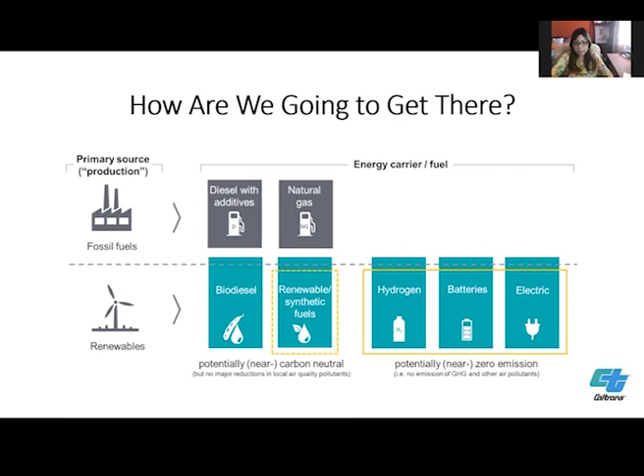Next slide. So what are we doing about it? I was going to brag about SBCTA's EMU project, but since Carrie has presented this already, I'll just say that we are a funding partner, as Carrie mentioned, and also a stakeholder in this very exciting project. I really appreciate Carrie for always keeping me in the loop of the project status and some of the key activities taking place. For details regarding this project, please look at Carrie's presentation from earlier.

Next slide. The other thing we are working on is pretty exciting—it's a joint project concept development between Caltrans, California Energy Commission, Governor's Office of Business and Economic Development, and California Air Resources Board. We have been meeting on a regular basis since last March to share information and opportunities, but we are really ready now to take our relationship to the next level.

So the first thing we are trying to do right now is look at each agency's goals and targets regarding emission reduction, and we are trying to align them to really meet the state goals. It sounds really easy to do, but it's actually really difficult because we are taking the holistic approach. I think it was Jonathan who mentioned this earlier, but in order for us to be successful in transitioning to this zero emission technology, we really have to take the holistic approach, or we will not be able to be successful.

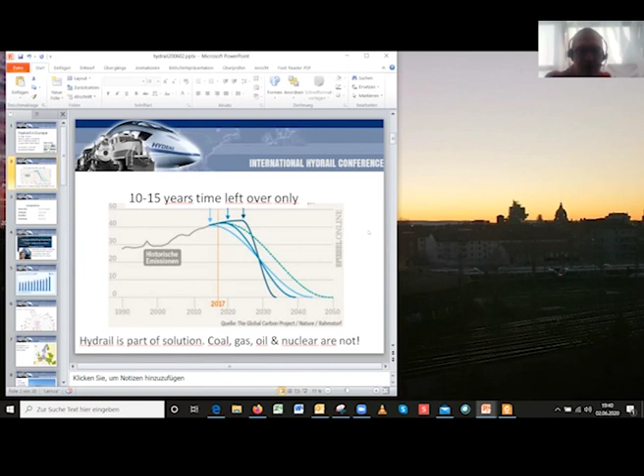So here's my slide for Saskia, whom we met last year in Bremervörde. She won the innovation prize for her hydrogen refueling station, which will be much more professional. Last year there were still only 2 rail cars in operation in Bremervörde, a small town I'll show in a moment. That will be extended by the end of next year to 14 rail cars, and you can imagine you need a really professional filling station for that. That's the one she designed, and she won a prize for it.

Sooner or later—just a moment, I have to swap the presentation. So this is a presentation from Alstom. They showed that... can you see that actually? Okay, let's do it this way. That showed that the timeline of the Coradia iLint is in good operation.

Since 2016, they've had 2 rail cars in operation, first in test operation, and now really in scheduled operation on the track, which I can show you here. This is Germany showing up here, about 1,000 kilometers. This is the state of Lower Saxony, close to Hamburg, around the area of Buxtehude, and that's the track where the trains are in operation.

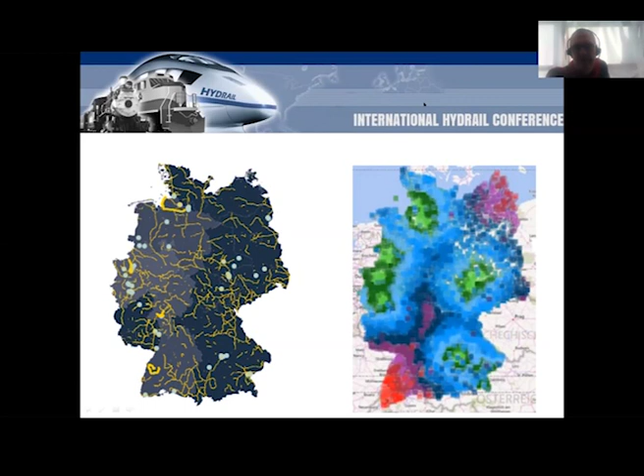So hydrogen is available already in Germany, and Siemens did a study comparing electrical multiple units (EMU), diesel multiple units, Hydrail, and battery multiple units (BMU) by the environmental effect, the grid stability, the operational effects, the economy, the needed savings on infrastructure, and the availability of resources. All these different kinds of trains have certain specifications which turn out to be more or less important for your own train operating systems.

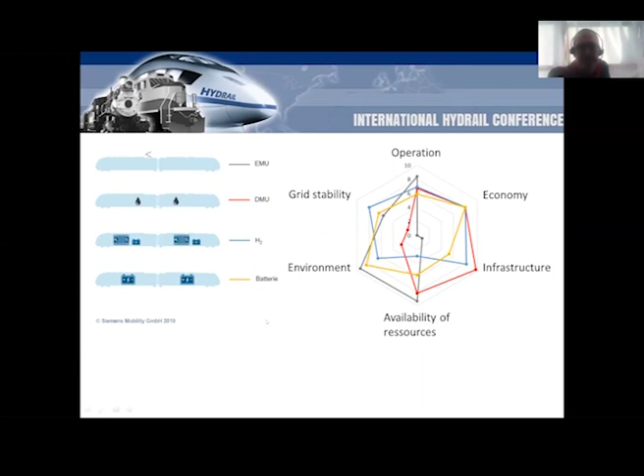So Siemens, and that's the most important point, did some kind of evaluation on which kind of rail car should be used for which kind of service - about the weight class of the rails, so standard or lightweight, and the speed. So almost everywhere 160, well this train can even go 200 kilometers per hour.

And how much is the range? That's the most important question in most cases. So you can go with the battery about 80 to 120 kilometers, and with hydrogen you can easily do 900 kilometers. So if you have an operation that is only on a short distance and you can charge at the end of the line, it might be - if electricity is available, clean, cheap, and always available at any time - that the battery train might be the better solution.

But if you have a lot of surplus power and you can shift the production of hydrogen, so the usage of electricity by time, then hydrogen pops in and will have good chances to be used. At the end of the day, Siemens is pointing out that the future will be hybrid.

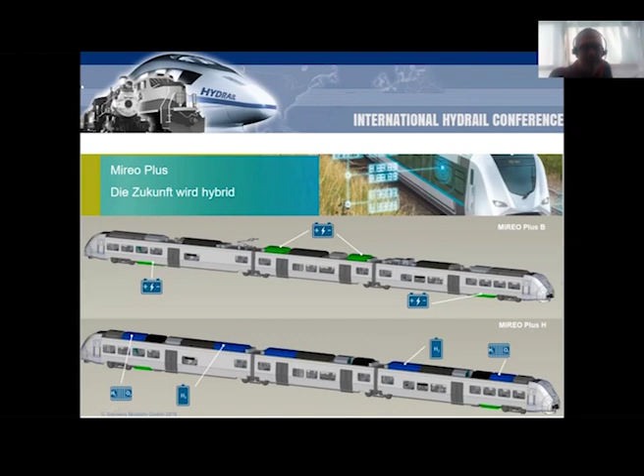So they plan always going double tracked, which is quite a good strategy in train operation, to be double tracked - so you have the battery electric multiple unit and the hydrogen electric multiple unit. The interesting thing is that they plan to have even the Hydrail train with the catenary system, so that enables them to be flexible - use the direct power of the catenary system and use the hydrogen where you don't have the infrastructure for that.